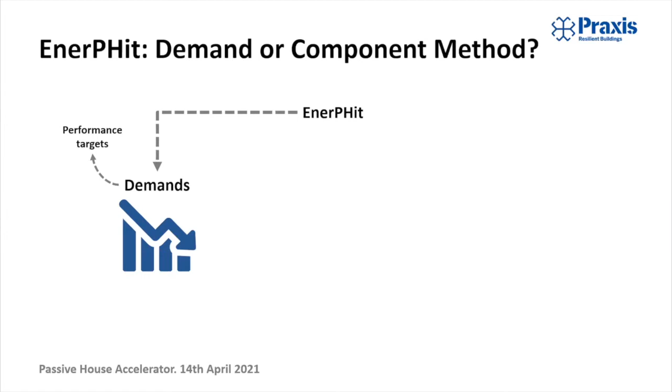As many of you will know, the Passive House standard has the EnerPHit seal, which is the retrofit standard for Passive House. It gives us two routes to achieving certification. One is the demand method, which is based on performance targets, similar to Passive House for new builds, based on meeting limiting energy demands. It's a good route if you can insulate your building externally, and it's more demanding.

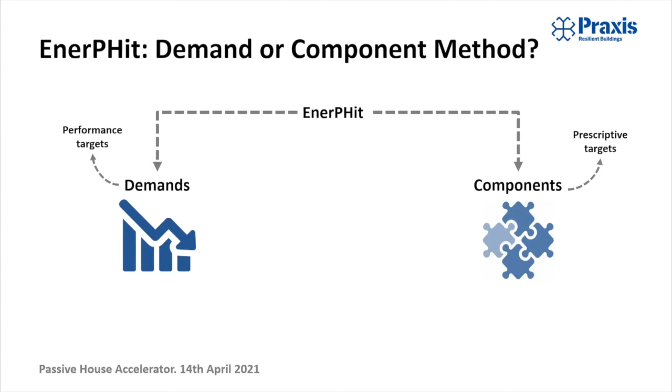And it also offers the component method, which is prescriptive, based on prescriptive targets. So the different building elements have to meet limiting U values. The component method is quite good for historic buildings, or any buildings in which you can't put large amounts of insulation externally. It's not quite as demanding as the demand method, but it's great to have these two options.

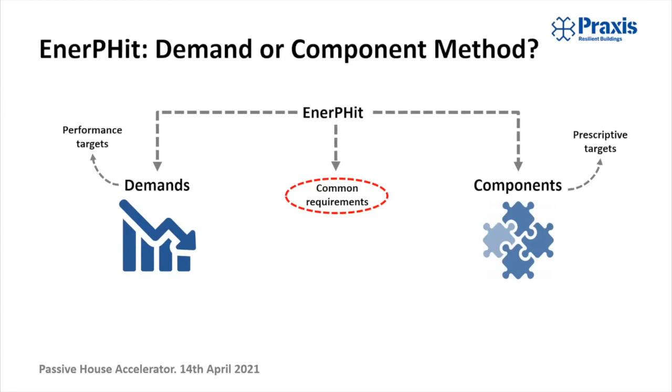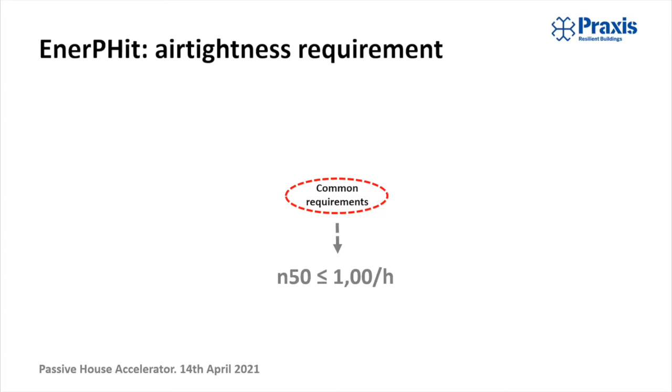Then there's the common requirements for both certification routes, of which the key one is air tightness. We have to reach 1 air change per hour at a 50 Pascal pressure difference. That's the one that causes terror in a lot of design teams. It's a big challenge, obviously, in existing buildings to get to that level of air tightness.

But it's clearly achievable, and given the number of buildings we've already built that are in need of deep energy retrofitting, it's really important to share these experiences and see where we can find low cost, effective solutions for air tightness.

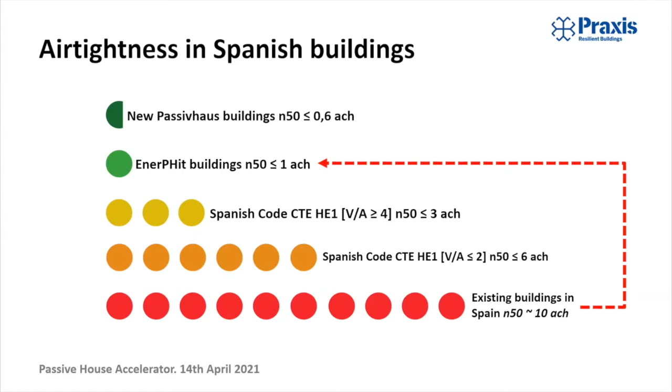Just to put you in context, in Spain, passive house new build will need to reach 0.6 air changes per hour. Retrofit, as I mentioned, the Spanish building code for more compact buildings requires 3 air changes per hour, and for less compact buildings, 6 air changes per hour. Existing buildings vary a huge amount, but we're talking roughly 10 air changes per hour of air infiltration. So we need a 10-fold improvement, which is quite a challenge.

There's lots of reasons to improve the air tightness of a building, as long as you control the ventilation. I just want to show one that I think is interesting, relating to the stack effect. When you warm air in a building, due to its buoyancy it rises, and that causes air infiltration on the lower floors and exfiltration on the upper floors.

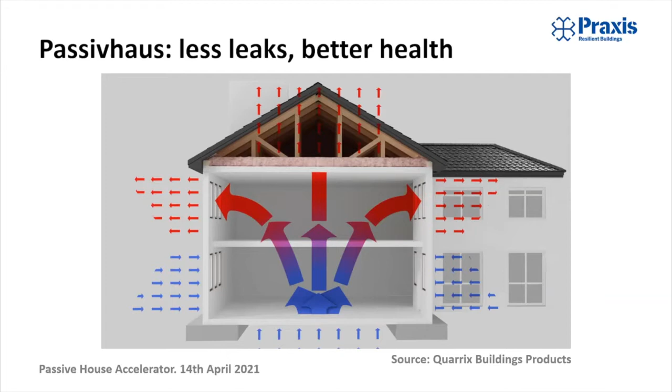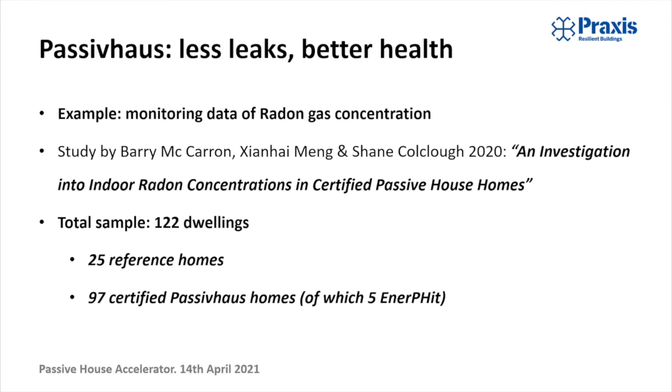One of the things this can cause in non-passive house buildings with lots of air infiltration is the entrance of radon gas, a carcinogenic gas found naturally in subsoil. This is a really interesting study by Barry McCarron et al., which looked at the concentration of radon gas in a series of completed certified passive houses in Ireland compared to non-passive house buildings.

It was quite interesting, because the concentration of radon gas in the passive houses, both on the ground and first floor, was below 40 becquerels per cubic meter, and didn't really vary much between floors. The normal houses had quite a high concentration of radon gas on the lower floors, basically because of air coming in through the ground floor.

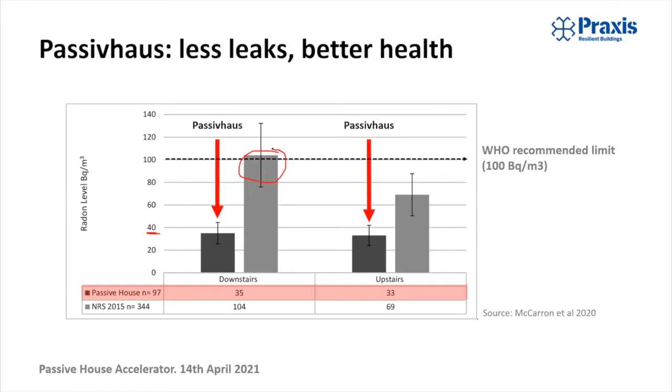So sealing a building up is good in lots of ways, particularly in health terms related to radon gas.

The project I'm going to talk about is a multi-residential retrofit of a historic building built in 1954 in Barcelona. This was basically a largely solid brick wall, about 29 centimeters thick, with some artificial stone on some of the facades. We couldn't insulate externally, so we had to do everything internally, and solid brick walls, like solid stone walls, are quite complicated when you're insulating internally.

Because if they're subject to driving rain from the outside, moisture can keep coming in due to liquid transport in the brick, and if you insulate a lot on the inside, it can be delicate in terms of moisture control, mold growth, condensation, and so on.

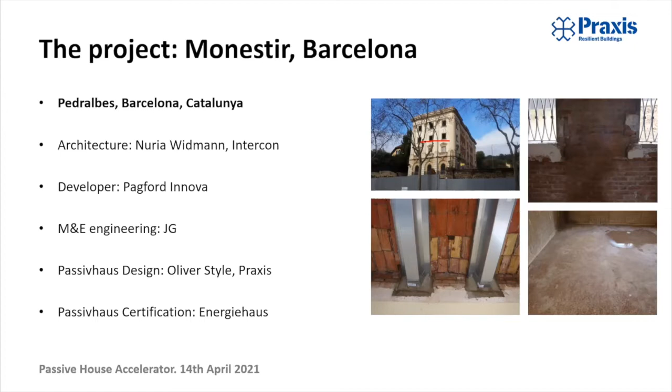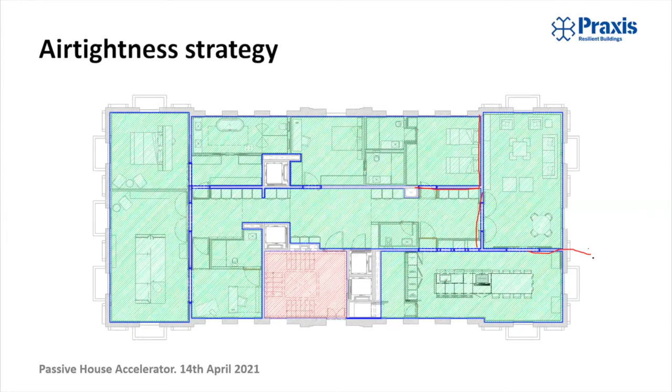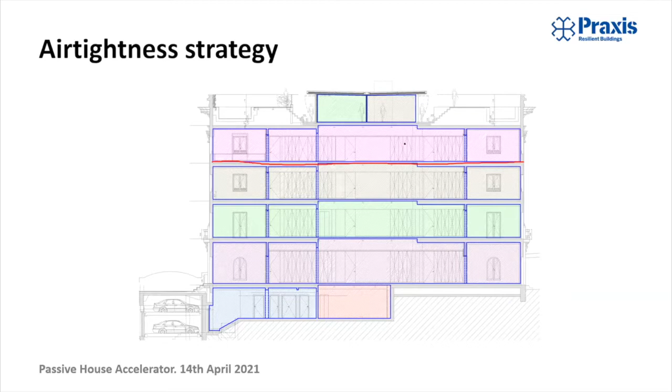Briefly, the air tightness strategy we applied on the project was for the whole building and per floor. We had an airtight layer running around the external walls, and also on the internal dividing walls, which could connect us to the outside at these points. Although we were going to test the completed building as one complete zone, we also did air tightness on a floor-by-floor level, for two reasons: one was to reduce acoustic bridging and noise between flats, and the other was to facilitate preliminary air tightness testing floor by floor.

This is a great image, I think, by Joseph Little, which shows some of the complexity of insulating a solid wall. Of course, if we put insulation on the inside face of a solid wall, be it brick or stone, we're reducing the temperature on the face of that wall, because we're insulating it against the indoor heat in winter. So as we lower its temperature, the relative humidity rises.

If we include a vapor barrier or a vapor check, we can also limit drying potential to the inside. So the standard rule of put a vapor barrier in and put lots of insulation has to be looked at quite carefully in these walls, because when it rains, these walls, the material itself acts like a sponge and moisture starts coming in. And if we have a vapor barrier, we can end up trapping that moisture in there.

So one of the things we looked at in this project was, do we want a capillary active vapor open strategy, or do we want a vapor barrier? Do we want a vapor check? Do we want dynamic vapor control? We looked at various different solutions and came up with one which was suited to the project in question and the local climate.

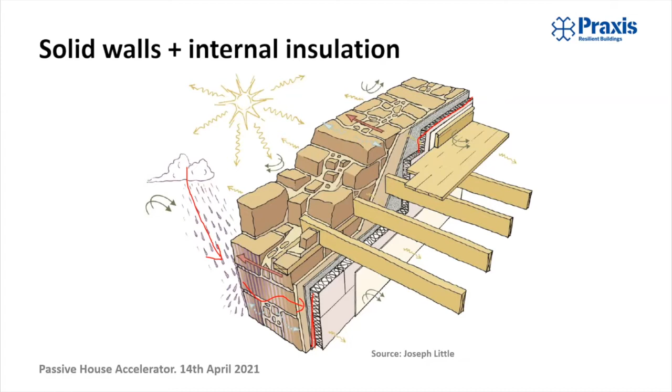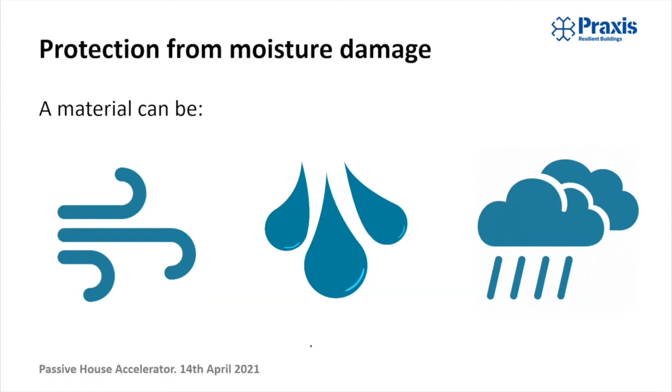So when looking at moisture control, we can look at materials and they can have different functions. A material can be airtight, air permeable, vapor permeable, or vapor impermeable, and it can be waterproof or not waterproof, in any combination of those three. So we have a range of materials at our fingertips which we can use, be it plastic membranes, liquid membranes, gypsum plaster, and so on, which offer different characteristics in that sense.

So we did a whole load of modeling for this project with the WUFI dynamic hygrothermal modeling package. I'm just going to present basically three that we kind of distilled, because we discovered that using vapor barriers or vapor checks could be counterproductive in this case for this building and in this climate.

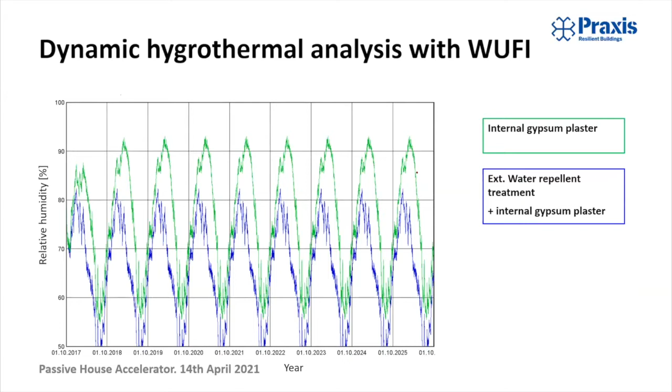So this is just internal gypsum plaster, shown on this green line, as an airtight layer but no vapor control. This second blue line shows the same thing, but with the outer face of the brick treated with a water repellent treatment, which I'll talk about in a minute. So quite a good improvement there, peaks of 80% relative humidity because of this water repellent treatment on the outer face of the brick.

And then just as a major comparison, what would happen if we put a vapor check on the warm side of the insulation? What we found in the simulations was that in fact drying potential was reduced a bit and the peak relative humidity was higher. So the solution that we opted for basically was this one.

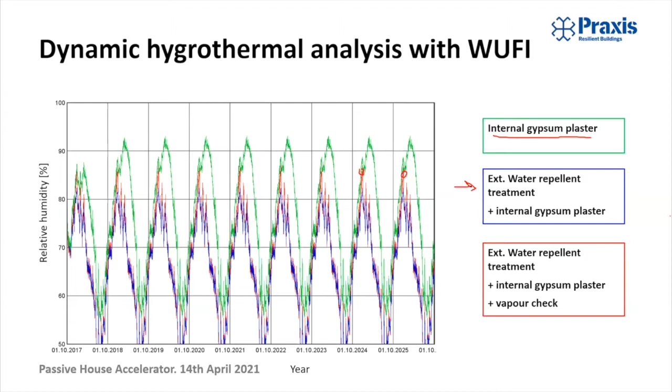Sorry, wrong one - okay. We went for a capillary active vapor open strategy coupled with a water repellent treatment on the outer face of the brick, which is sometimes called brick cream. I know that historic building specialists, and I'm sure some of you here tonight, may question the effectiveness of a solution like this, but this is basically a treatment which is like a Gore-Tex. It reduces by about 90% the water absorption of a brick, but maintains its vapor permeability.

So it's quite interesting for solid walls in historic buildings in which you can only insulate internally, which are exposed to driving rain. It stops the amount of water getting in through liquid transport, but it means that the wall can still release water vapor.

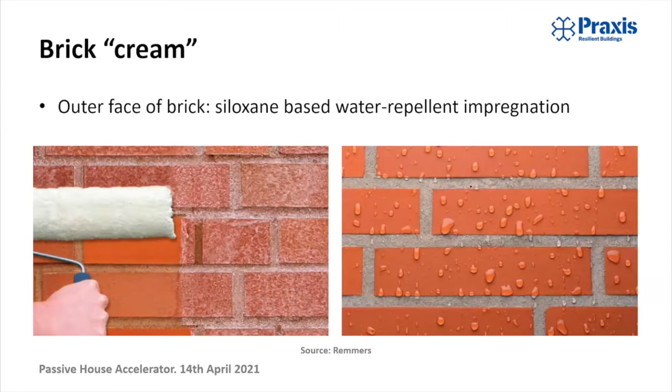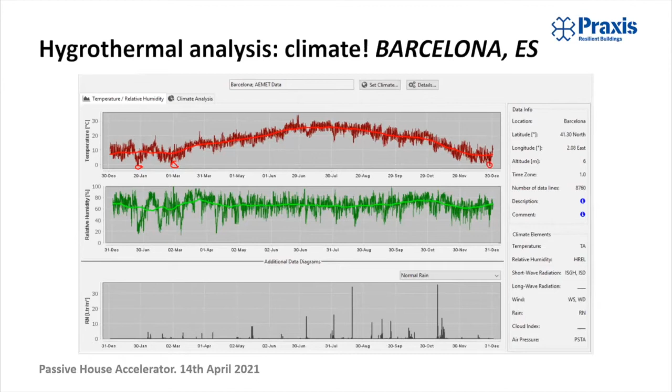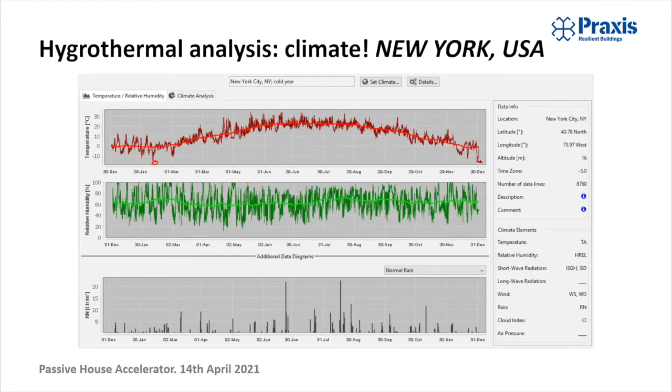So of course a lot of this analysis is really dependent on climate. This is just quickly a profile of the temperatures we have in Barcelona. It doesn't really get very cold. When it gets to about 0 degrees here in Barcelona, everything just sort of stops and people start burning their furniture to stay warm. Whereas in New York, you get down to -15 and everybody's still kind of happy. So these are quite different climates which need different solutions.

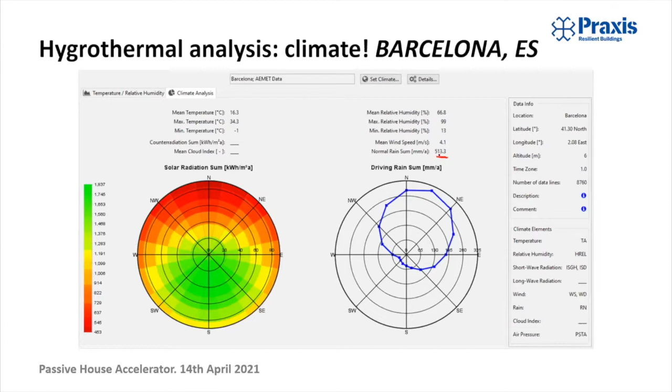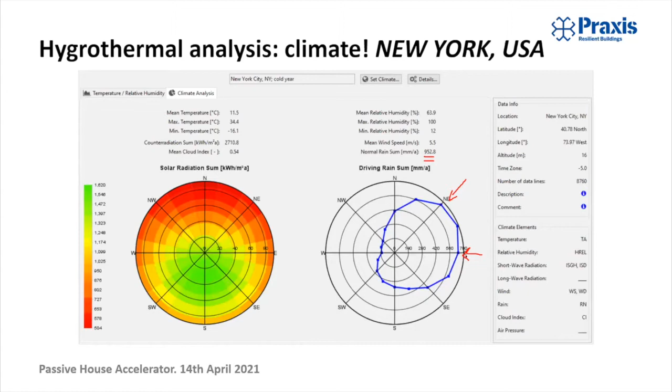So one of the main things we need to look at if we're using internal insulation on solid walls is the driving rain. This is the climate file for Barcelona, which shows 500 mil a year of rain, whereas in New York, almost double that. So any wall, for example, which is going to be facing northeast or east in New York, is going to be subject potentially to lots of driving rain. Those are the ones we need to be particularly careful with and look at that in design phase.

So just to summarize quickly, what we found was that internal insulation of solid walls is tricky. You need to look at each one on a case-by-case basis.

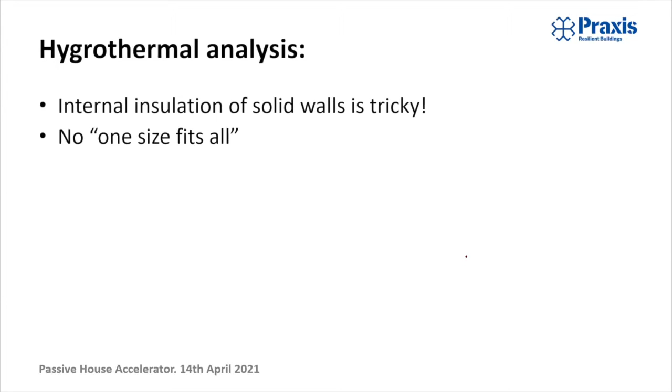There's no one size fits all. Clearly in cool temperate climates, a lot of the climates you have in North America, internal vapor checks and vapor barriers are often going to be needed, but it's important that they don't also reduce the drying potential to the inside of a solid wall, be it brick or stone. So it's important to look at each enclosure on a project-by-project basis.

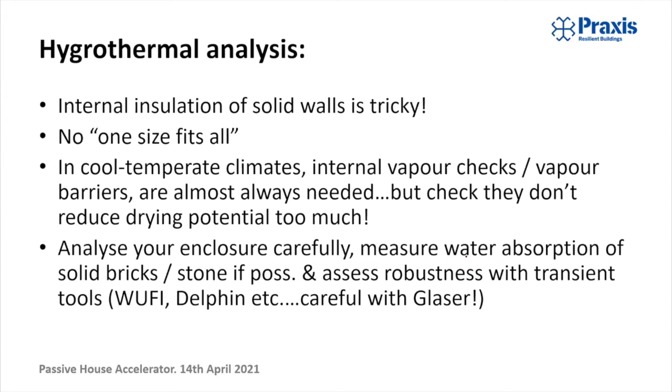If possible, measure the water absorption of your existing wall, be it solid brick or stone, and look at the robustness of your solution with hygrothermal tools if possible, like WUFI, Delphin, and so on. The Glaser method, the simplified method for condensation analysis, is probably far too simplified in the case of these kind of solid walls with internal insulation. So it's always good to be able to monitor performance and learn and improve along the way.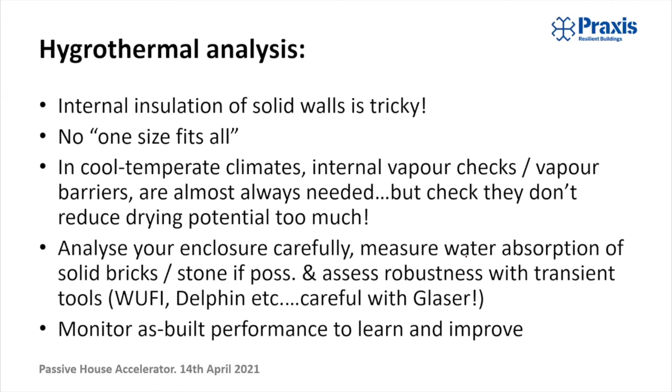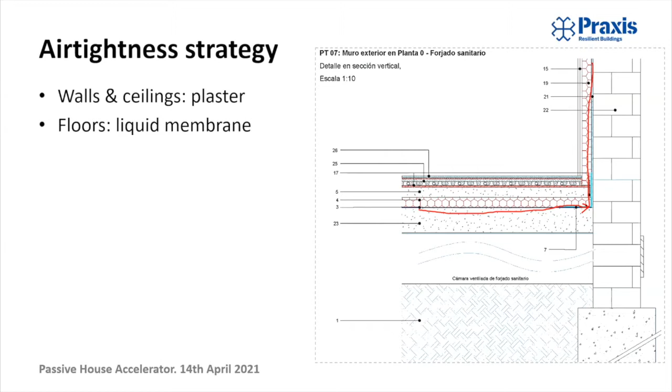The air tightness strategy we applied in this project was, as I said, very simple. Gypsum plaster applied on the inner face of the existing brick wall. On the ground floor, we had a liquid membrane sprayed onto the terrazzo floors, and the join was sealed with airtight paint. On intermediate floors, we also applied the liquid membrane on the floors and then the gypsum plaster on the walls.

Insulation was sprayed cellulose between galvanized steel profiles and plasterboard. The profiles were brought in from the wall slightly to avoid thermal bridging and make sure the insulation could get in there. And then we had foam glass insulation on the floors.

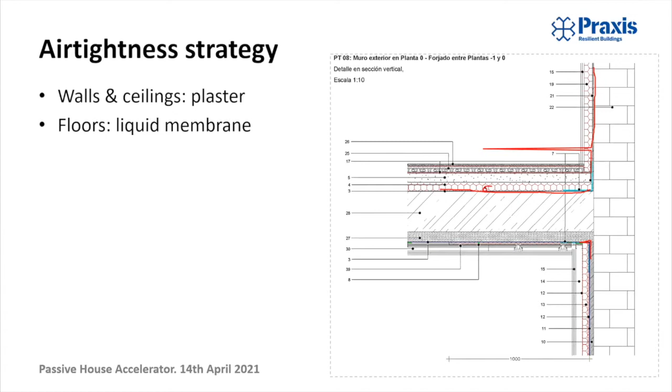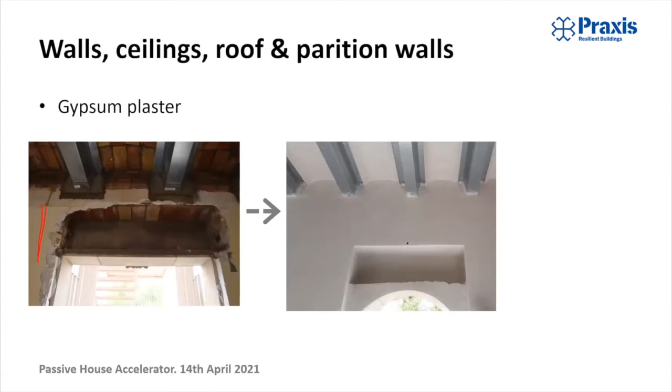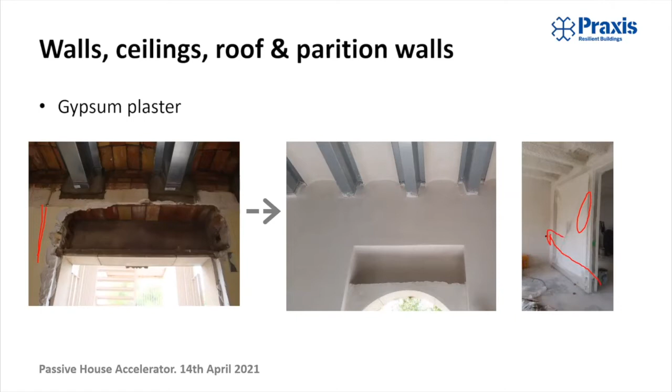There was already some existing plaster on the inner face of the brick walls that was all cleaned off and then replastered. So it was a solution that the local tradespeople knew well, and it was applied at reasonable cost. We also did all of the internal walls as well to avoid any leaks going through to the outside walls. This is some images of the liquid membrane on the ground floor and intermediate floors.

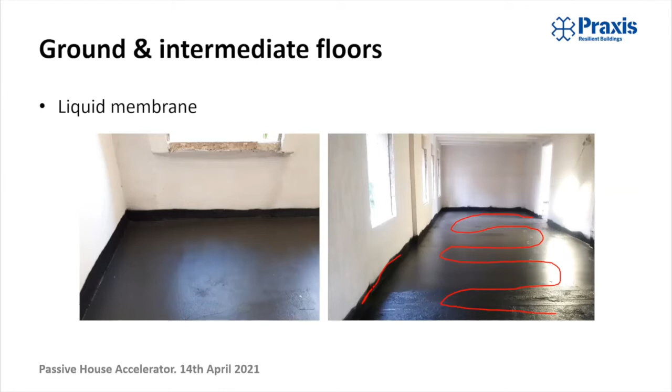Given the results we got on the blower door test, we could have probably done without the liquid membrane on the intermediate floors, and some cost savings would have been possible there. But this is the solution we applied, which was sprayed on the joint with the walls to seal them. Service penetrations, of course, were also sealed with plaster and airtight paint.

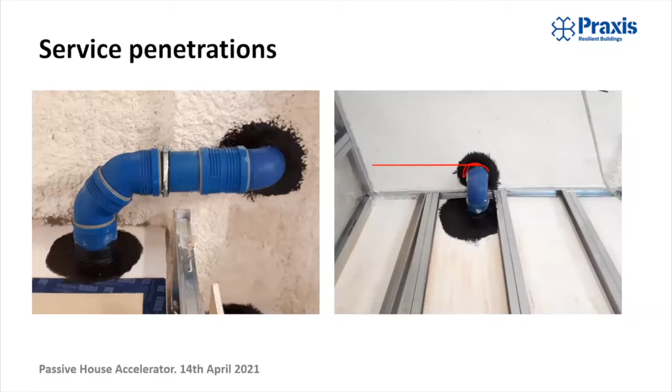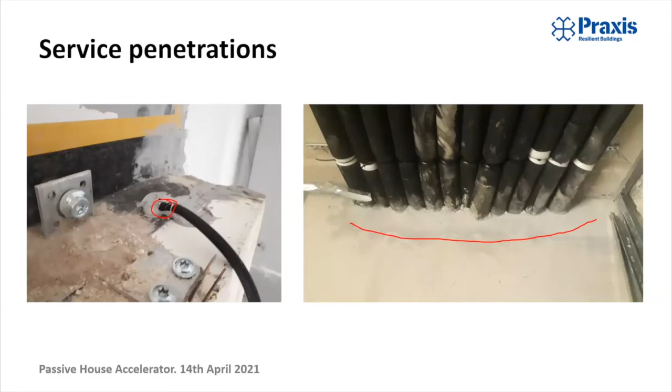So anyway, we had to keep on top of all of the service penetrations, cables for the motors of the blinds as well. And there you go. So this is just a few images of the insulation system, which was sprayed cellulose internally, which is an interesting solution because you get a homogeneous, complete covering layer of insulation.

It's important to do it in the summertime or the warmer months because obviously there's quite a lot of liquid in the cellulose once it's applied. If you then seal everything up in the winter when it's all wet, you could have a few moisture problems. So it's recommendable to do this in the warmer months if possible.

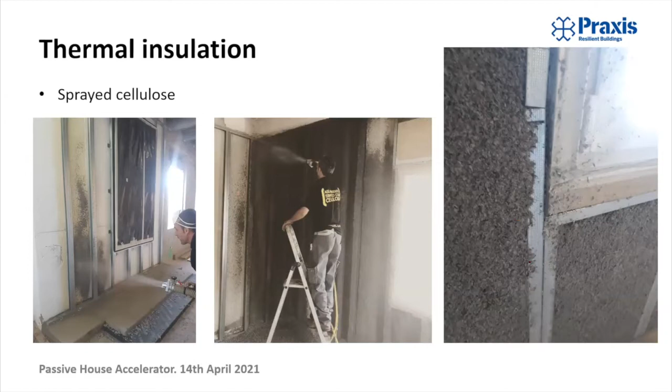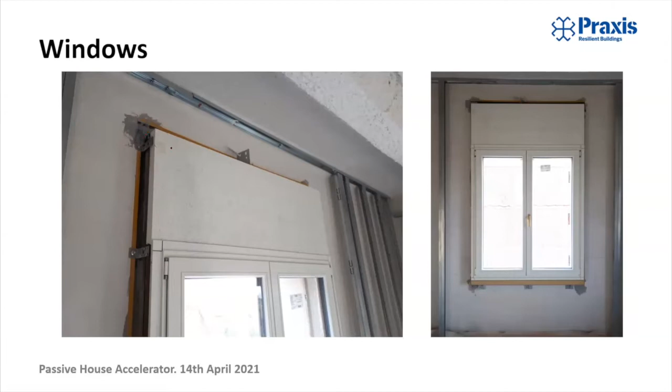The windows, we had the blind casings fixed to the window frames in the factory, and they were delivered on site like this. So the window frames and the blind casings were all delivered on site together, which was a great solution because it just saves lots of headaches in terms of air tightness through these blind casings, which is essential in warm climates to have some shading.

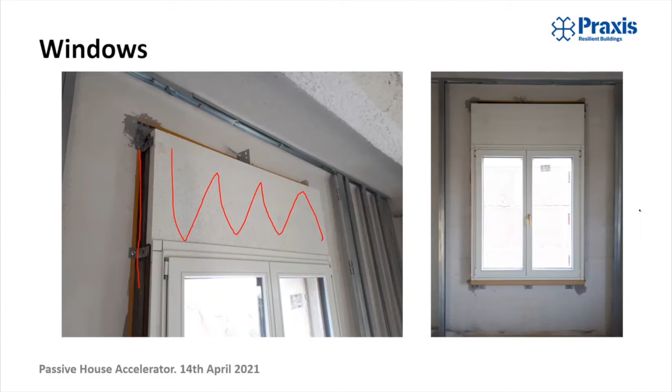The windows were fixed with metal steel brackets to the inner face of the wall, airtight tapes, and the windows were basically installed in the insulation layer to the inside, reducing the thermal bridge installation coefficient. Here you can see a wood fiber and polyurethane board to hold the window on. These steel brackets obviously create point thermal bridges, but it's a good solution, and the airtight tape here taped to the gypsum plaster. So the airtight tape was put on before the brackets and then fixed to the wall and taped. It's important to get some primer on the walls before you tape so that everything sticks nice and well.

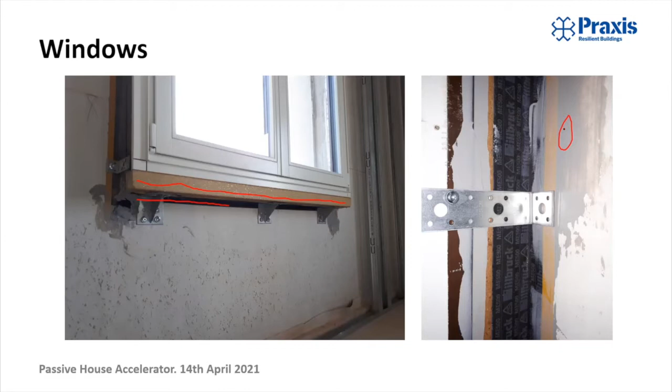So we did the air tightness testing on all of the upper three floors of the building.

Here you can see some of the smoke coming in from the handheld smoke generator. So there was a bit of leakage through the window seals here, but it wasn't significant because the results were very good. One of the great things about this famous blower door test is that you can really see what's happening, and in the preliminary test with the smoke, you can correct things if need be. I think it's a great way for everybody, trades, project design people, to understand the scope of the challenges and what works and what doesn't.

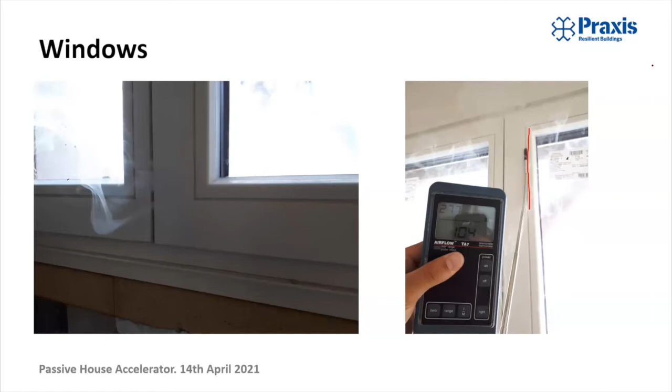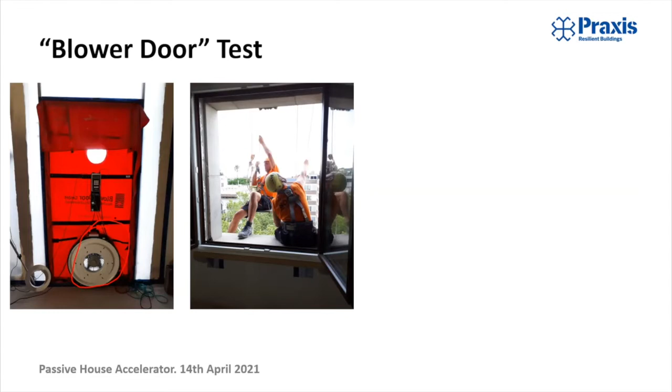So here's a few images of the blower door machine, which many of you will probably have already seen. It's a machine that pressurizes or depressurizes the building, meaning you can measure the amount of air coming in and coming out. We had a couple of guys hanging out the windows with the smoke generators, and the results were really good.

On the first floor, we got 0.36 air changes per hour at 50 pascals, so quite far below the requirement for passive house new build. 0.31 on the second floor and 0.47 on the third floor, a few more leaks to the roof. So really good results, well below the limit for passive house retrofit.

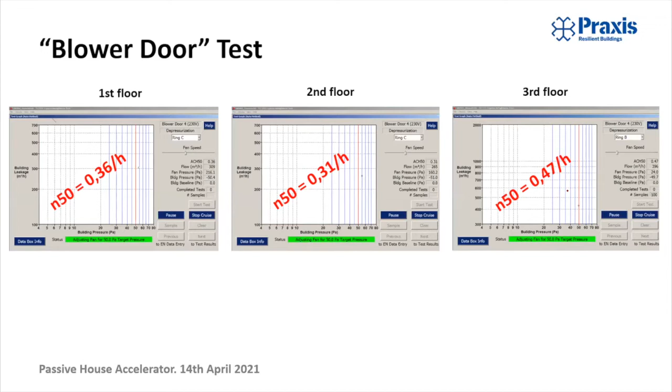Just finally, a quick look at what the impact of air infiltration is on the energy consumption of this building. These are modeled energy consumption for heating, cooling, hot water, and electricity of the existing building with 10 air changes per hour, and then the energy demands if we reduce air tightness to 0.6. So 37% savings just because of air tightness in the Barcelona climate.

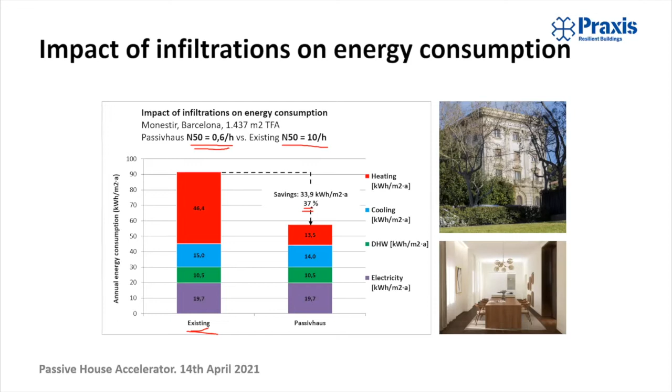Clearly, if you're in northern Canada, those savings are going to be far greater. In Barcelona, we don't have very harsh winters. In euros, at an electricity cost of 19 cents per kilowatt hour, the savings for this building is in the region of 9,000 euros a year for the whole building. So even in the Barcelona climate, reducing air tightness to passive house levels has an economic rationale, and of course many more important ones to do with health, comfort, and reduction in pathologies and moisture problems.

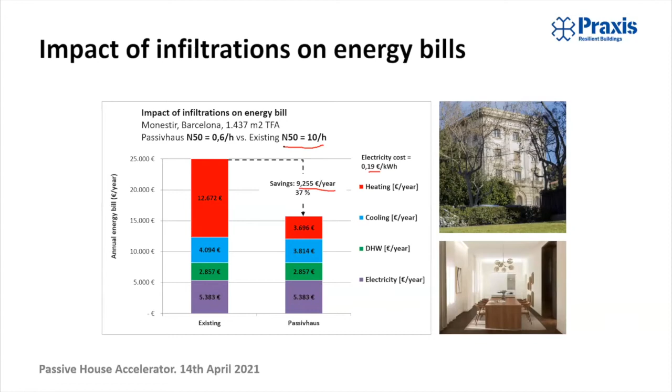Fantastic. Thank you so much, Oliver. And we know that it's really late for you, so stick around as long as you would like to, and we'll be thankful for any of your time. Great, I would happily stay around for a bit. I'll need to get some sleep at some point, but okay.

Well, let's dive into the questions, Oliver. I guess first one is, how many cups of coffee have you had in the last hour or so? So I think there's number 2. All right, that's pretty good.

First one, we're going to head over to Cameron Duncan. Cameron? Oliver, thank you for the presentation, it's very good. I have sort of a side question, because in my area, we have historic buildings that people keep adding on to. So my question was, with Passive House, do you have a hybrid? If you're building a new addition and you have an existing historic property, do you do a retrofit on the existing and a separate standard PHI for the new work?

I think it's possible probably to do a variety of different things. If you have the certification criteria, the PHI certification criteria is that if you have an existing building which has part retrofit, then I think you probably can do the whole thing according to the retrofit standard. I think it just depends a little bit on each specific project, but one of the most important things is that it's possible to have an exemption based on the kind of building and the limitations that it has. Obviously, historic buildings, you're not going to be able to do certain things that you could on a new build, and that will dictate the route that you can go. So I don't know if that answers your question very well, but I think the basic underlying concept for retrofit of Passive House is that it has to be the whole building. You can't retrofit one part of an existing building and get a certification, at least from the PHI. What you can do, though, is a step-by-step retrofit, you can have a pre-certification of one part of a building. So yeah, I mean, I think the bottom line is, you need to really do a whole building, and if that's not possible, then you can do a step-by-step retrofit.